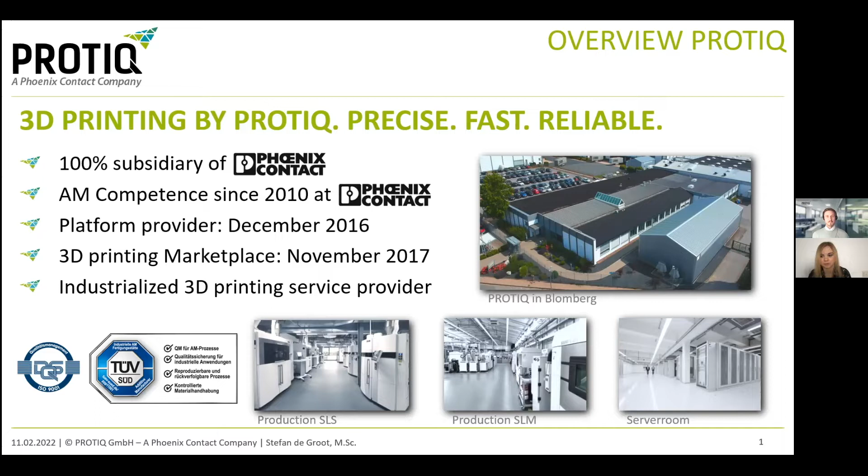Furthermore, we have the production for laser melting, which you can see in the middle of the slide. In this context, we are also using standard machines for the daily business for standard materials, like stainless steel, tool steel, aluminum, and the common materials for additive manufacturing. Furthermore, we have developed another self-built machine on which we are able to process innovative materials for additive manufacturing, like for example high conductive coppers or zinc. I think we will talk about the materials later.

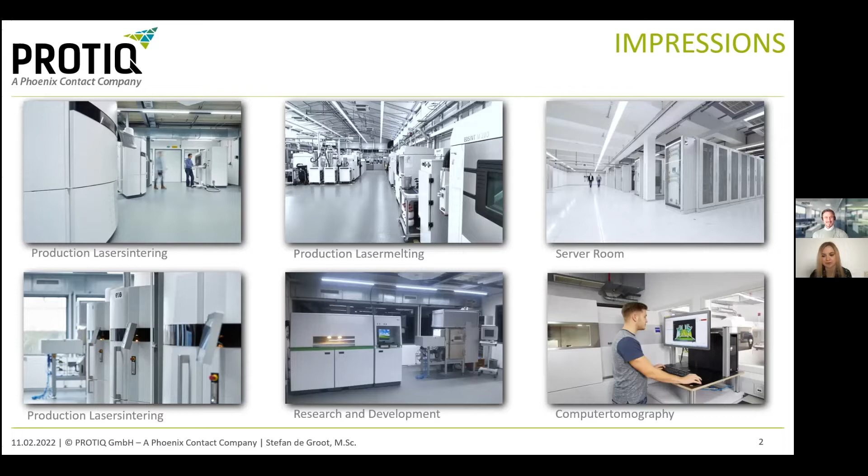Okay. But to understand the process, first of all, the person should upload the CAD file. Exactly. After that, could you please show your next steps? So we will start with the start page. Our customers are able to directly upload their 3D files on our start page. He can simply choose the demo component for presentation purposes now, and then it is uploaded on the platform, and our algorithms check the part in terms of producibility, wall thicknesses, and geometrical dimensions, for example. After this, the customer gets a direct visual feedback of the uploaded part with the file information, for example.

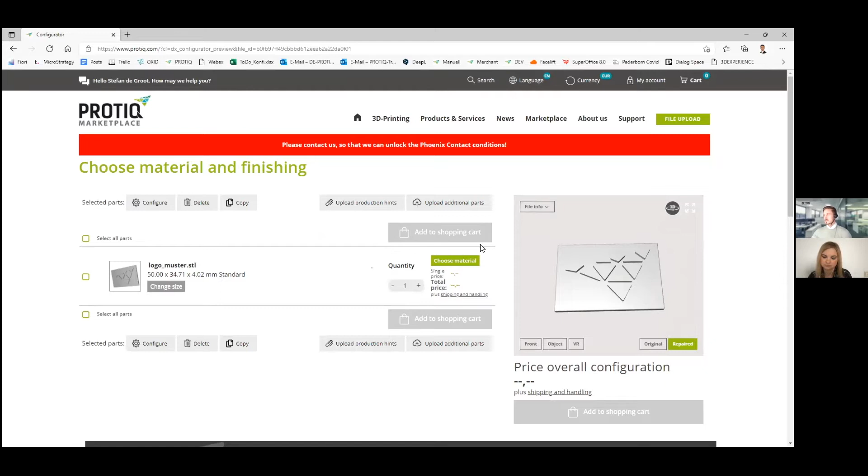And then the customer is also able to directly jump into the material overview and can simply choose the desired material out of all the materials which we are offering on our platform. So for example, the top materials, as well as plastics, metals, ceramics, or glasses.

And when the customer would like to order this part made of polyamide 12, he also gets the live pricing. So immediately after uploading the part, the customer gets the live price information, so that he's fully flexible 24 hours a day, 7 days a week in obtaining quotes. And so this whole process of obtaining quotes can be reduced significantly.

And after this, when he has decided for the polyamide 12, for example, he can have a look which service providers on our platform are offering this material. And for each service provider, the customer also gets the live price information for this part. And then he can simply select the service provider he would like to work with, select the material, and then we also have a scale effect on the platform. So if the quantity gets higher, the price per piece gets lower, for example.

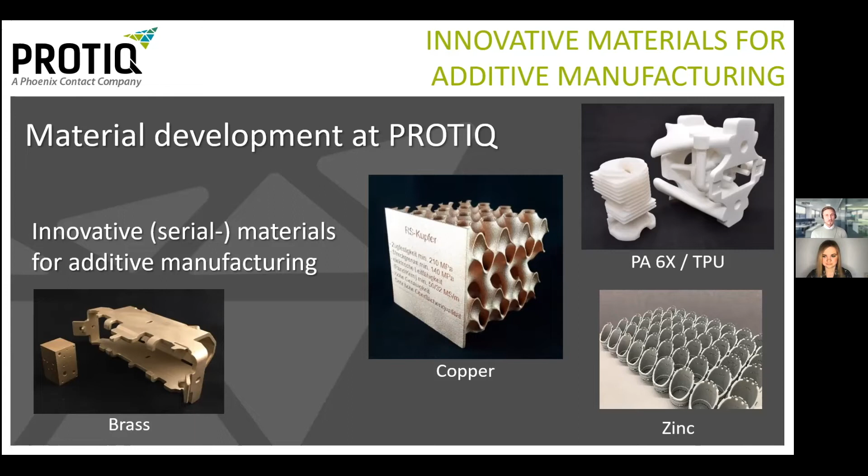And now I would like to give a short overview about the copper materials which we are able to offer at PROTIQ. So this gives the customer a big advantage for brand new applications for additive manufacturing.

So, for example, for heat exchangers, as well as DC applications and charging plugs with internal cooling systems. And with these innovative materials, we saw that we also needed to have this personal contact again with our customers, with the big players, to do workshops and find the right application with our customers.

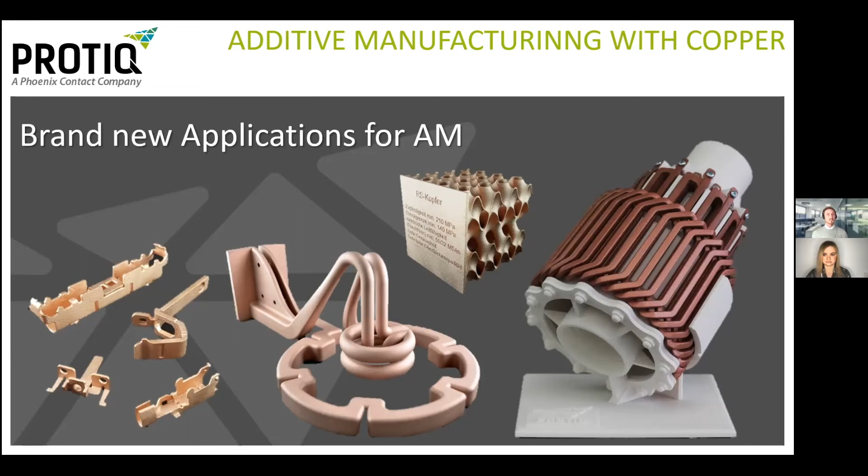And one specific application which offers really huge potential and many benefits for additive manufacturing of high conductive coppers is, for example, the area of induction coils, inductive heating, and inductive soldering. The traditional manufacturing is characterized by a fully manual process, so that, for example, a copper tube is filled with sand and has to be bent and soldered manually.

And based on this, by using templates and considering bending radii, we have many different single components which are combined, and therefore we have many areas which include many possible breaking points after a short application time. And the big advantage for additive manufactured copper and induction coils is that we can merge all the different single components to one component and produce it in one building job with 100% reproducibility.

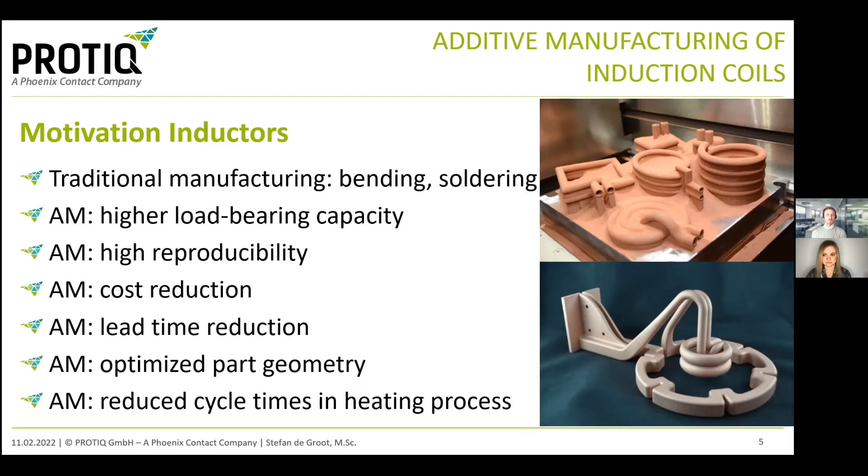And by this, we can also optimize the part geometry of the induction coils. And this also gives the big benefit of simulation-based optimization. So we are also able to do an optimization of the whole inductive heating process by using the traditional design as a basis, do a magnetic field simulation as well as a simulation of the heating process. And after this, we can do a design optimization and directly print it on our machines.

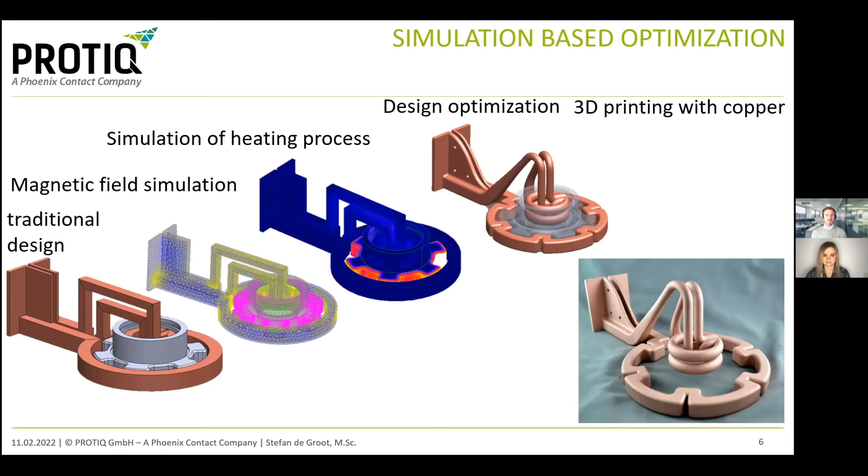So when the design optimization is done, we are able to print the part within 1 or 2 days. And this is really much faster than the traditional manufacturing. And this week we were also able to finish our new demonstrator for induction coils, which includes mostly every advantage of additive manufacturing in comparison to traditional manufacturing for this coil application. And this you can see here.

And the big advantages of additive manufacturing presented here are generally greater design freedom and functional integration. So, for example, we have smooth transitions of windings to improve the water and the current flow. We can avoid sharp edges and solder seams significantly, which increases the coil life and reduces the failures. The lower two coils contain an additional cooling channel to integrate a quenching function during the curing process in the heating application.

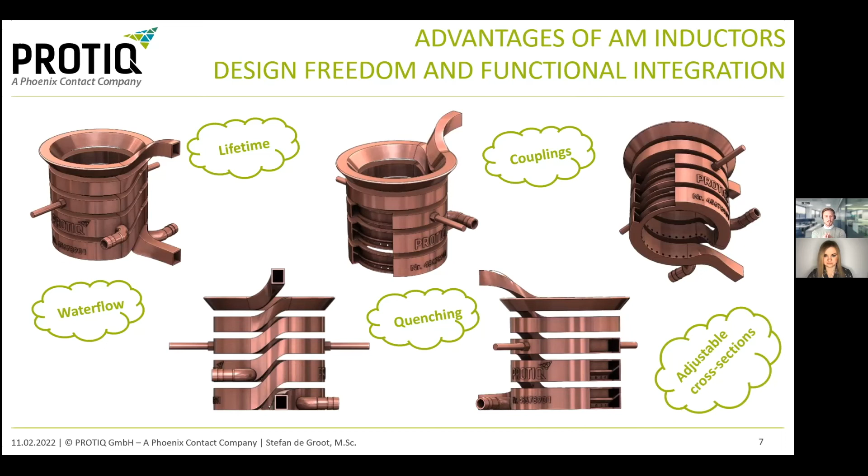And then we have a quick coupling for water connection that can be printed directly in one piece, just like any other component. The cross sections of windings can be freely selected and varied over the coil height, so that we are able to make a bigger wall thickness in special areas of the inductor. And it's also possible to add a labeling with serial number or article designation directly on the coil. We can add mounting bolts that are provided for mounting the coils in the application process, and many more.

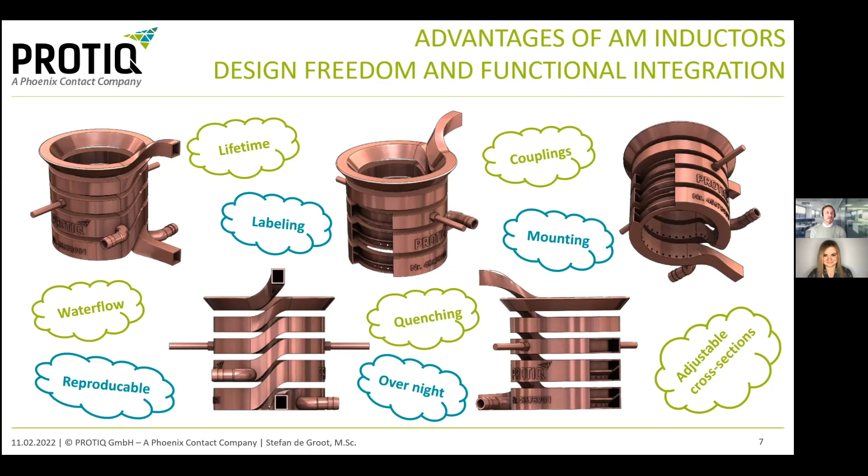As I told you before, the reproducibility is one of the biggest and most important factors for our customers, because with additive manufacturing, we are able to produce the same coil in batch size 10 or in batch size 100. It's 100% reproducibility, and we are really much faster than the traditional manufacturing of coils. So this should be a short example for the induction coils.

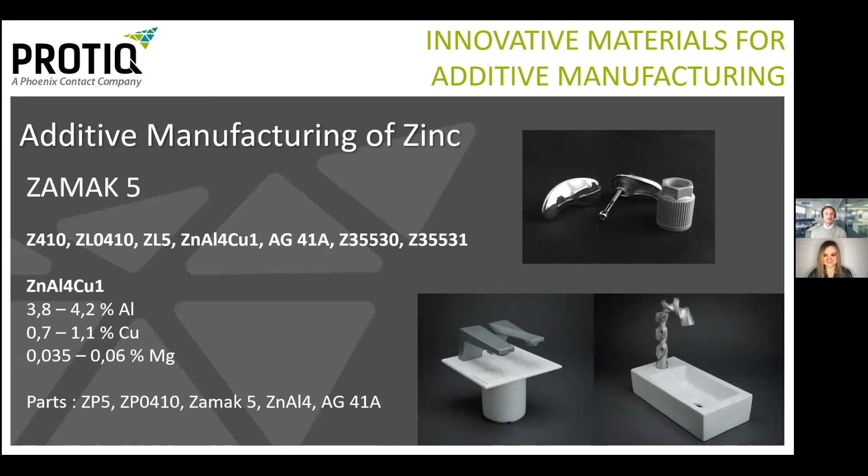And furthermore, another interesting area is ZAMAK 5, the zinc material, which is also processable in additive manufacturing as a substitute for zinc die casting. And by this we are also able to offer serial production for high quantities, not the high quantities which we know from zinc die casting in traditional manufacturing, but for quantities of 100, 200 or 300, for example.

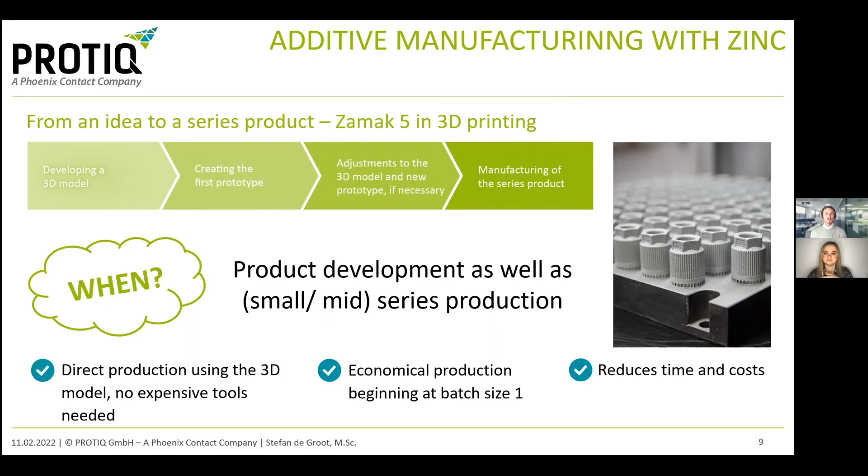We are also able to address the big advantages of additive manufacturing, that we do not need any expensive tools to start the production, and are able to do an economical production beginning at batch size 1, and can therefore reduce time and costs significantly.